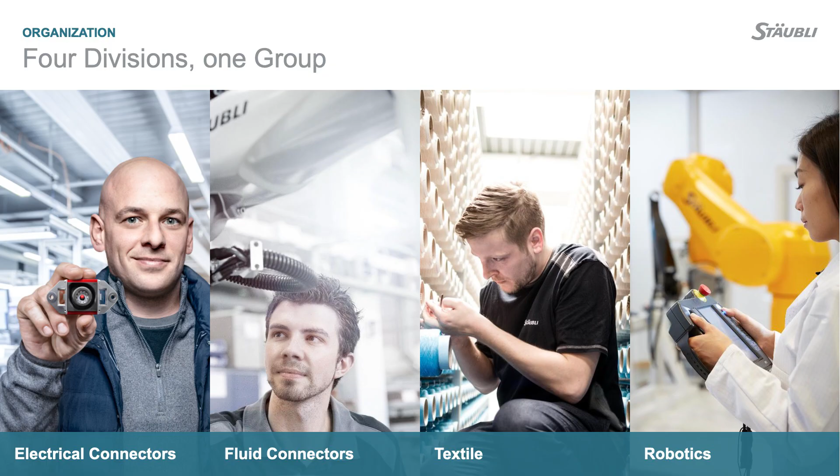Stäubli is composed of 4 divisions: electrical connectors, fluid connectors, which is exploding due to the supply of fluid connectors to data centers for AI, textile, the historical part with more than 100 years of history, and the robotics division, founded in the 80s of last century. Just a quick overview of the robotics division, founded in 1982.

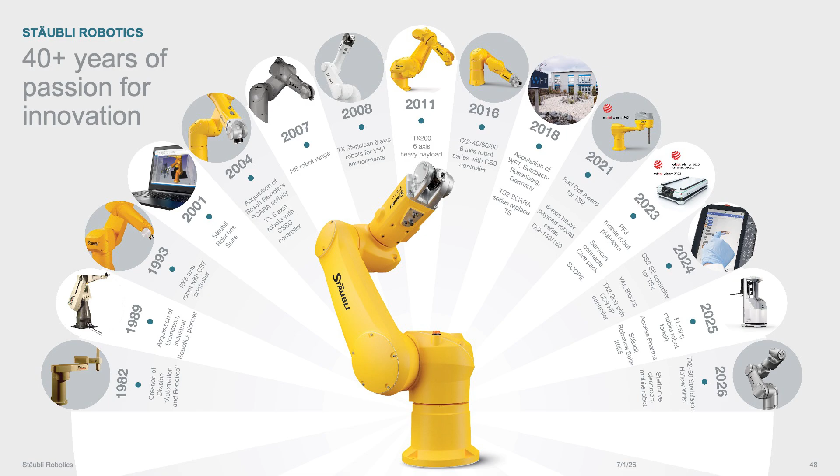One remarkable part was the acquisition of Unimation, a pioneer in robotics in the US, in 1989, and all the evolution till today. One remarkable point is the launching of the mobile robots in 2023, and last year we presented our FL1500, a counterbalanced AGV AMR, which is having a great reception from the market of logistics.

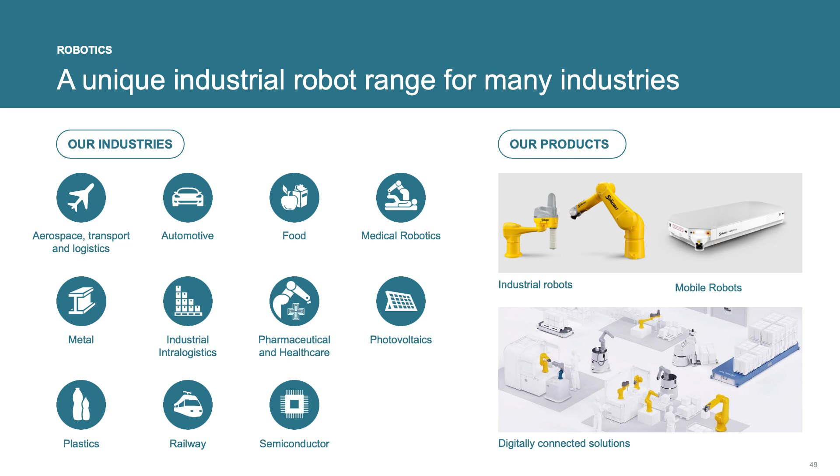We are present in almost every market. We are very well known for what we call life markets like food, medical robotics, and pharmaceutical. We are present in all the other markets like automotive, defense, and we are here in order to deep dive in our product for metal markets.

Yes, and I would like to present to you CNC Solutions, which is our company. We are a machine building company, and we are also a dealer of ENCY for Belgium. We focus on milling, grinding, but also cutting applications, laser applications, and we do this with Stäubli robots. We are a Belgian company, so located in Europe. We were founded in 1992 by my father. So me and my husband are now 2nd generation in the company.

We started with 3-axis milling, and we evolved into robotic milling throughout the years. So we are active for over 30 years. This robotic milling evolved to other applications also. So our company has a long story. We have solutions in 3 different types. We have turnkey, so for the end user who is looking to automate the process, to have a complete machine to go from design to workpiece, we can deliver a full solution.

We have the technology package for integrators, so robot integrators who want to integrate their own process into it. And then, as I said, we are a dealer of ENCY for everybody who has a CNC machine or a robot, of course.

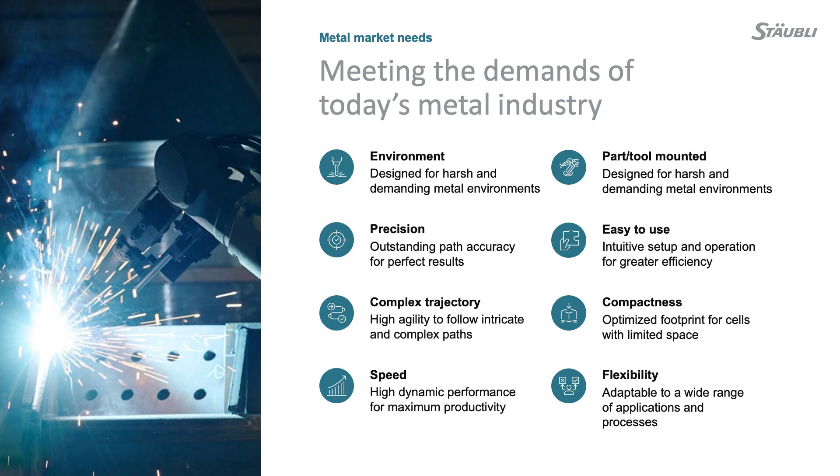Thanks, Lieselot. In the first half of the morning, we discussed a lot regarding ENCY and in which way we can generate trajectories. In the following minutes, we would like to deep dive in what happens after the trajectory is generated in order to create the best process possible in terms of manufacturing. The metal industry right now is a demanding environment with harsh, demanding features. It's demanding a lot of precision, complex trajectories, as was well explained before.

The speed is a very important feature because the return on investment of machines is becoming more demanding day by day. So producing with a high speed ratio will increase the return on investment of the machine. And also ease of use for the customer and flexibility are becoming very important day by day due to the lack of experienced users worldwide.

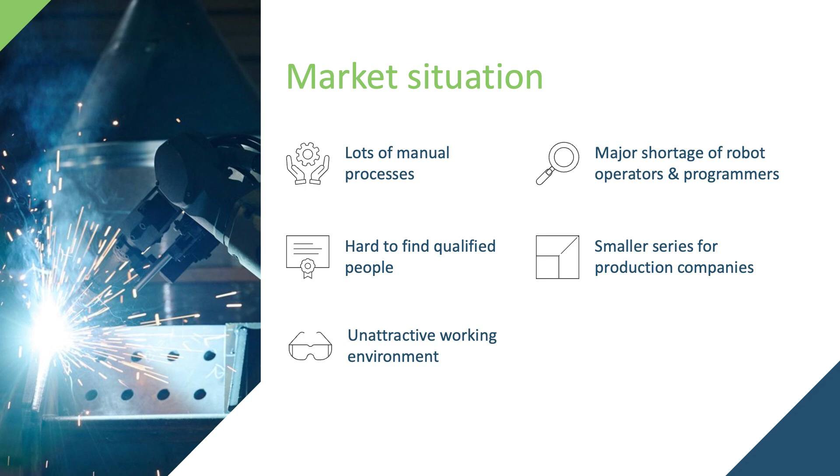What we also see in the market is that there are still a lot of manual processes. A lot of things are still done by hand, mostly by people who are very experienced, but who are not so easily replaceable. It's very hard to find qualified people. Companies are more and more looking to applications that have no-code programming. Mostly these manual processes have an unattractive working environment. For example, if somebody has to grind all day, it's a lot of dust, it's not so healthy. A lot of people don't want to do it anymore.

On the other hand, if you want to start working with robots, there's a big shortage of robot operators, robot programmers. So we were looking for a much easier solution. And then we find also that customers need much more flexibility. They need to produce smaller series and they have to be able to switch easily.

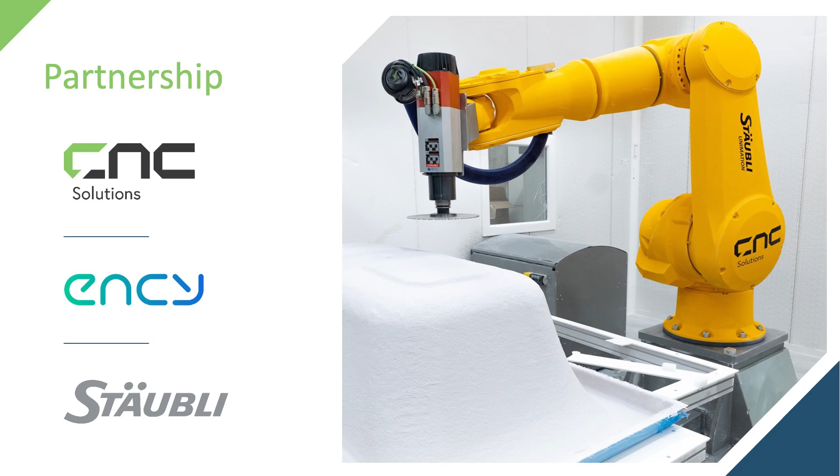The solution that we present for this is a partnership between CNC Solutions, ENCY, and Stäubli Robotics. And we call it the technology package. The technology package is a controller that you can use to control your robot like a CNC machine. So it makes it much easier than robot programming because you can program it like a CNC machine.

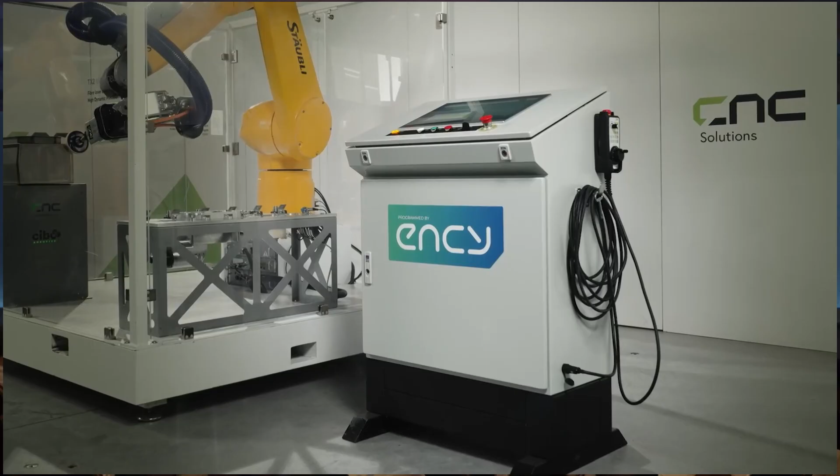So why did CNC Solutions choose Stäubli Robots 15 years ago, and why do they remain on this position?

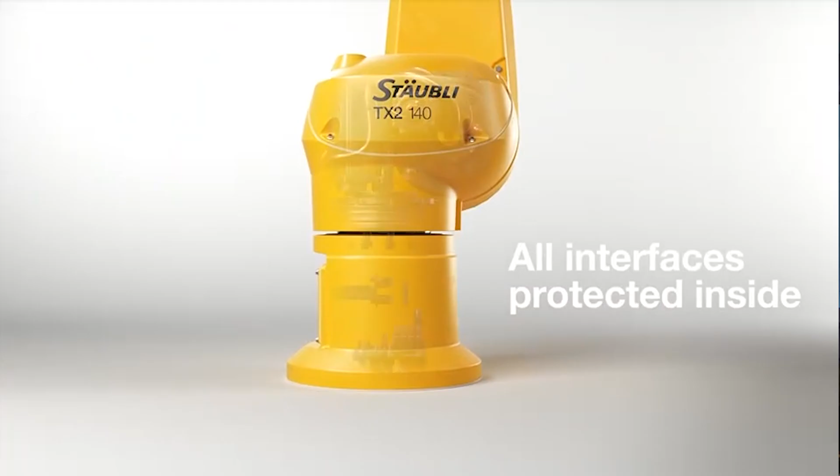Just a focus on our TX2 range. As you have already seen by the previous video, our characteristic is a fully encapsulated robot, so you cannot see any motor outside, and this, from my point of view, is very beautiful. People say that Stäubli is a reference as a very beautiful robot. For harsh environments it's important because the closed structure can protect the cables and all the other sensitive parts.

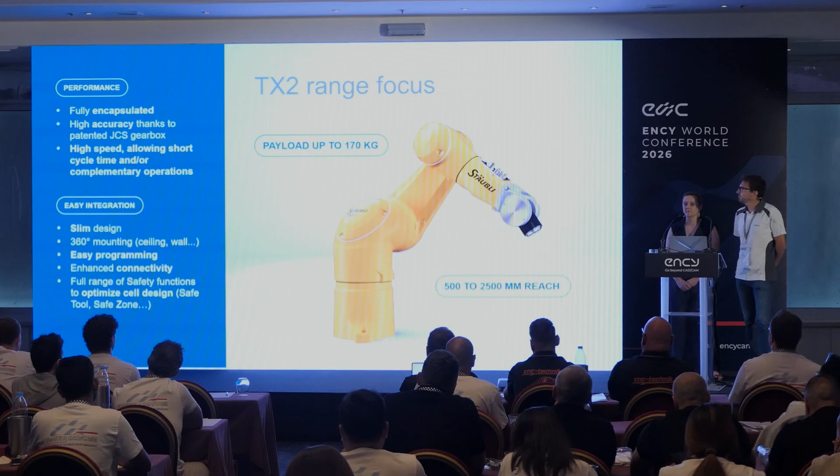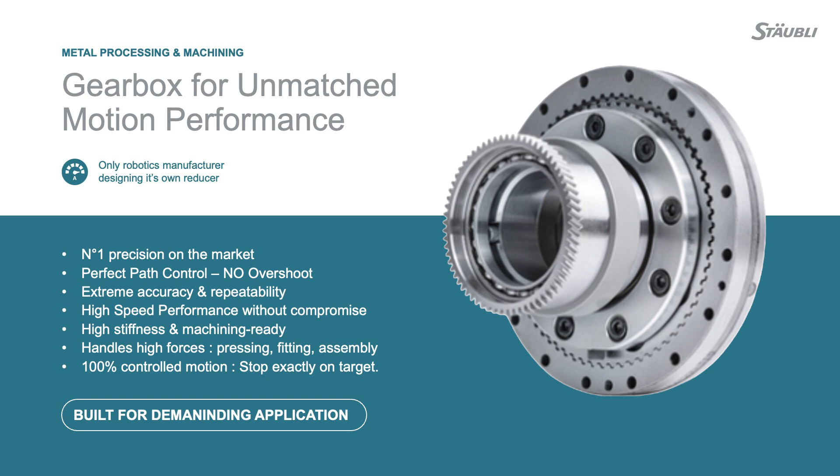There is very high accuracy, and one of the main features is that we are the only robot manufacturer who creates his own gearboxes. We have more than 8 patents, and we manufacture our gearboxes in our production plant in France, which are a reference for the market in terms of precision and speed.

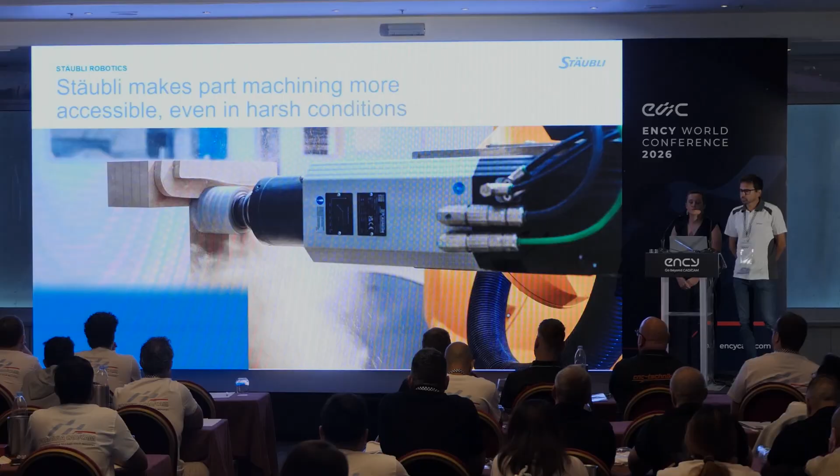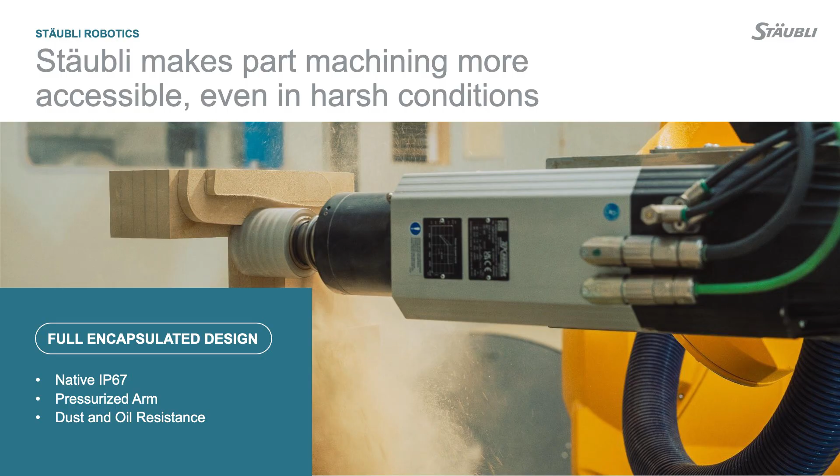As I said before, we will go into details regarding some processes and explain why, for us, the combination between the CNC Solution Technology Package and Stäubli Robot could be a game changer for the development of ENCY worldwide.

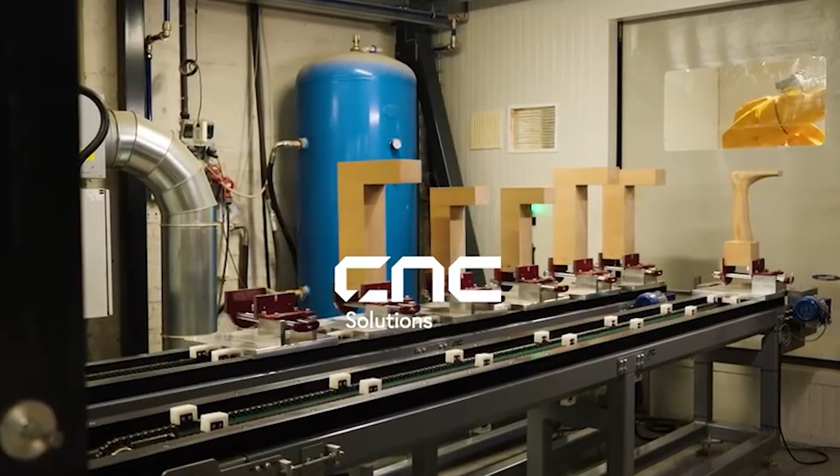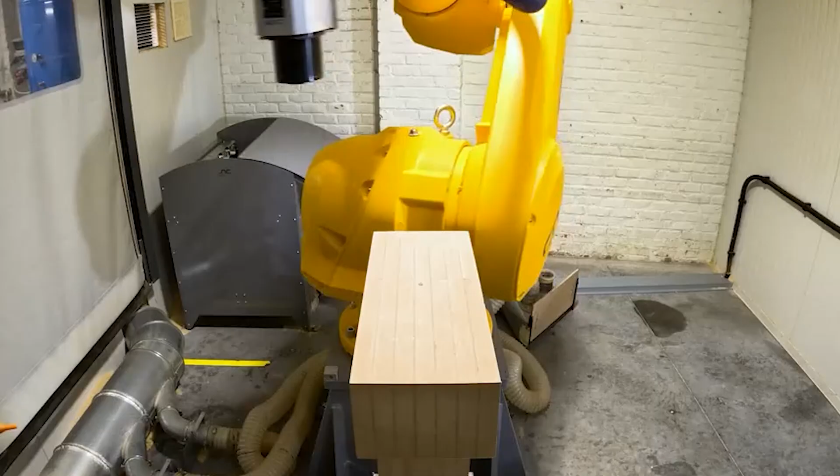Starting from milling. A Stäubli robot is very good for a harsh environment. We have a project here with a customer who makes orthopedic shoes. They scan the foot of people, then with the scan they make a foot out of wood, and from this wood they make the shoe. Since they are scanning people's feet, every piece they create is unique, so they mill the feet every time, once and again.

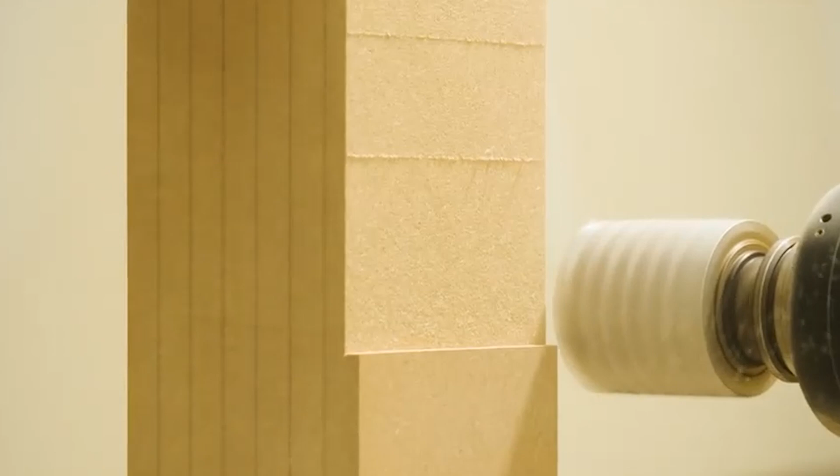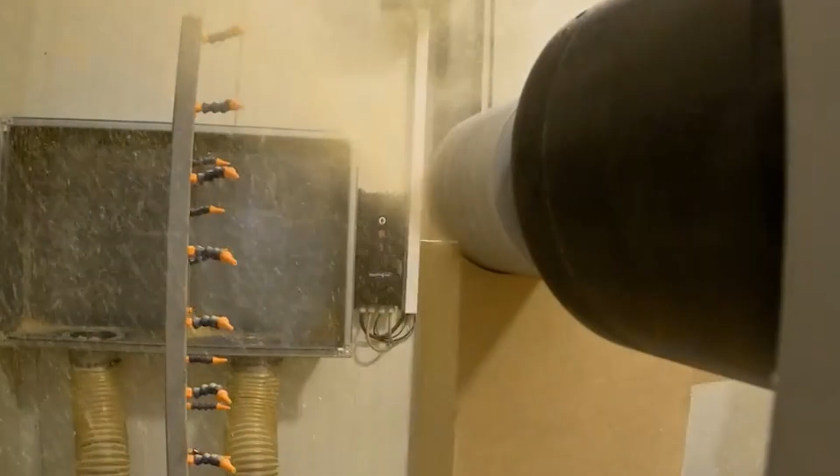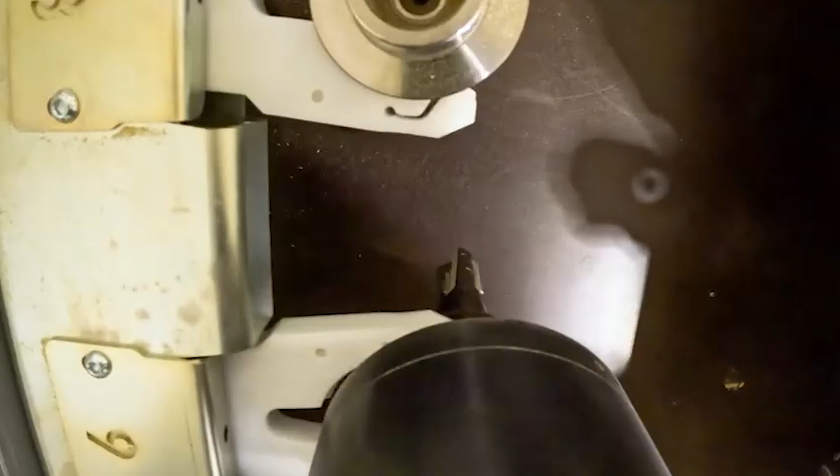How do they do this? Of course the toolpaths come from ENCY. We created templates for them, so they put their information from the scan into these templates, and with just a few clicks they can mill the foot. This is all done by one person, so there's no dedicated operator needed to control this machine. Somebody just programs ENCY, puts on the workpieces, comes back a few hours later, and then the pieces are ready.

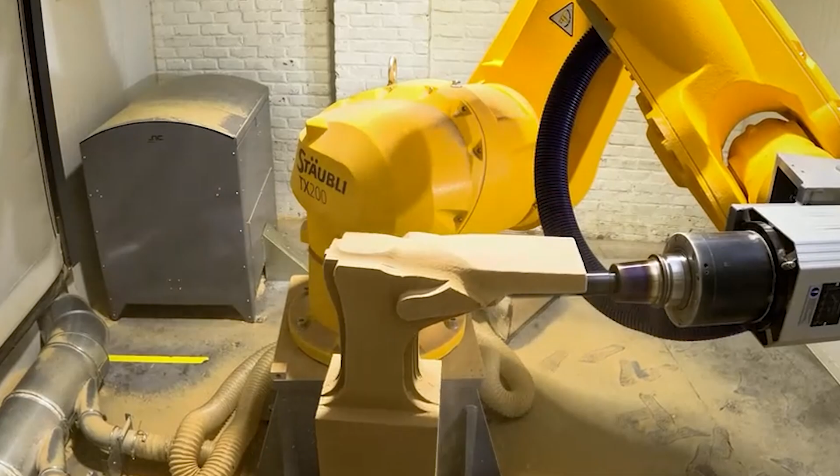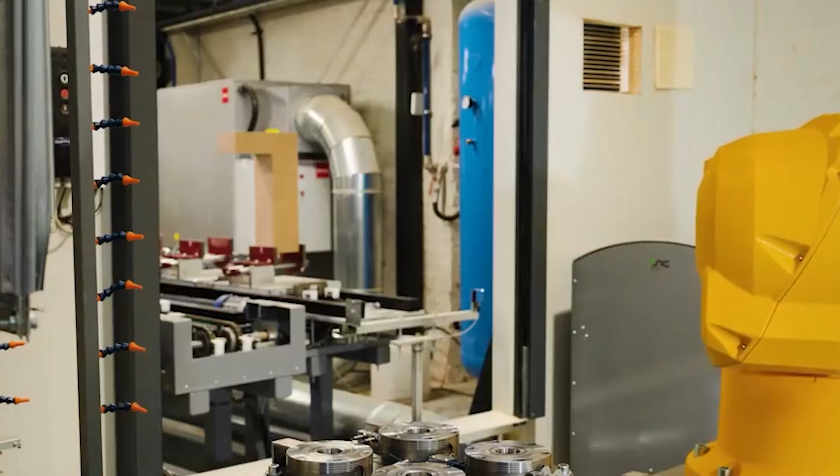As you can see, the pieces are automatically loaded and unloaded from the machine, so the operator only has to be there every few hours.

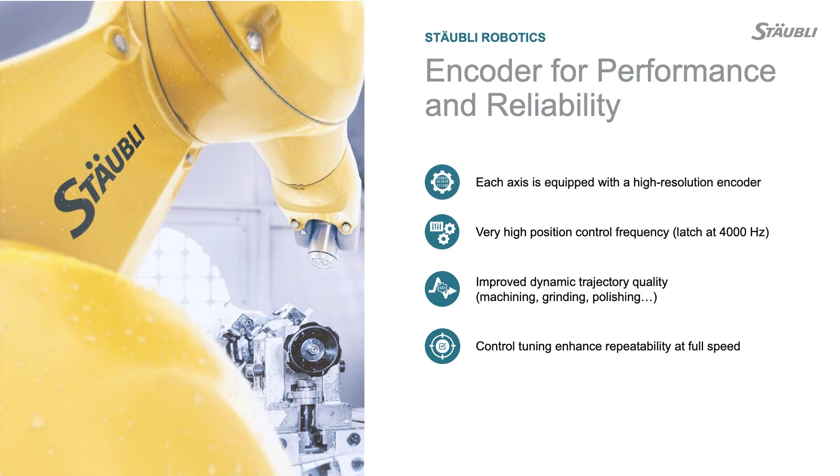Also, the tuning designed to handle our motor and gearboxes with our drive gives us very precise path control. A little bit more technical digression.

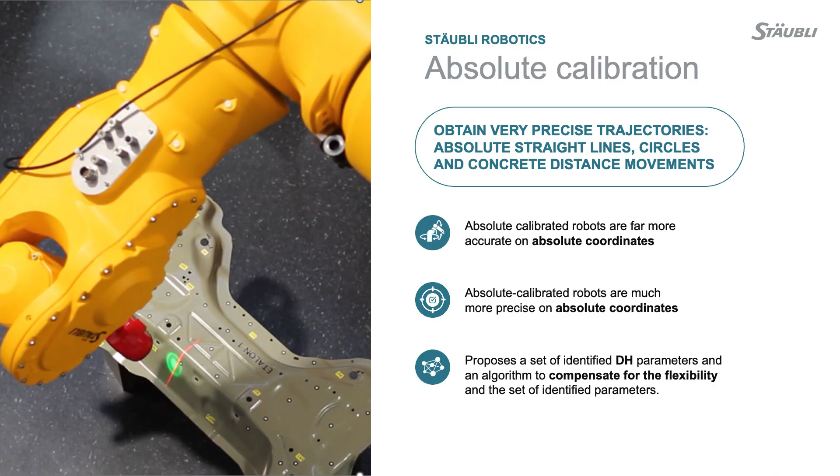We all know that if a robot is doing a pick and place, precision is very important. If the robot is used in the traditional way, moving with the teach pendant, teaching points and relaunching, only precision matters. In a CAD/CAM application like this, accuracy has a very big impact on the quality of the process. That's why we propose, and use massively, our absolute calibration feature.

It means that every robot produced in our factory is measured using a laser tracker in order to adapt the DH parameters, the Denavit-Hartenberg values which are the distances between every joint, so that the algorithm of inverse kinematics matches exactly this robot.

Without absolute calibration, the mathematics of the robot would use an average of the robots produced. With absolute calibration, we measure the robot as it exits the factory to be sure we are inserting into the robot controller the effective length of this specific robot, following the variation of production.

And this lets us have one of the best accuracies in the market for this type of robot, the TX200 that we are seeing here, a robot with 100kg payload and 2 meters long.

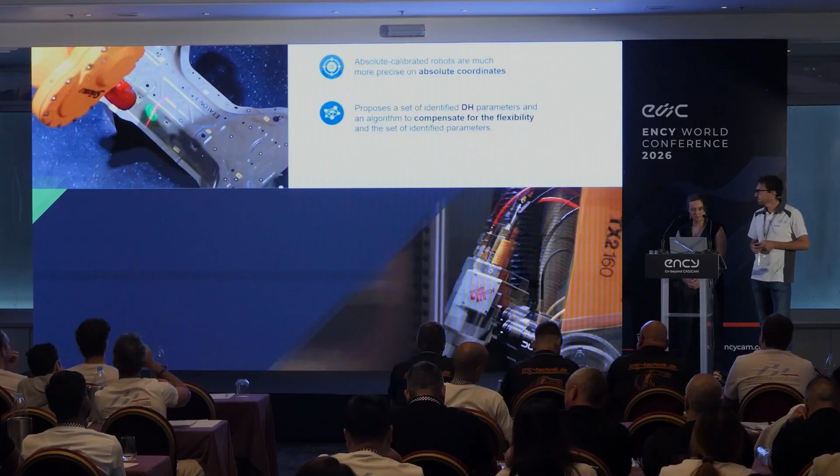So we can show you a laser cutting example where we will be laser cutting on flat plates, but also in 3D. Of course precision is very important here. The combination of a very precise robot with toolpaths in ENCY is a golden combination for this application.

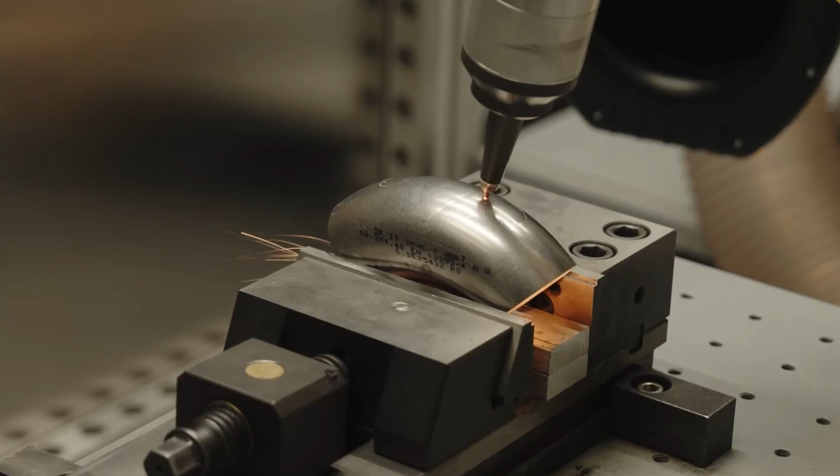After that, we have generated a trajectory using ENCY, as we are seeing from our videos. The robot is transforming this trajectory to a process.

One point that is very important is the rigidity of the robot, because if we're talking about pick and place, we can make this process with cobots, or what we call marshmallow robots—robots that are maybe light, maybe cheap, but they don't have enough rigidity to transform the trajectory into a reliable process.

What we said before, the patented gearboxes, the enclosed structure, and the precise trajectory generation combined with absolute calibration lead us to be one of the most appreciated robots in the market in terms of rigidity and stiffness. And this led us to all these processes that we are seeing here.

And of course, if you're looking for flexibility, then ENCY software is the way to go. In the next video, we can see different approaches to laser a piece. We do that in 4 different ways, and every time it's precise. It's a laser demo, so you will see a small light showing what the laser trajectories are.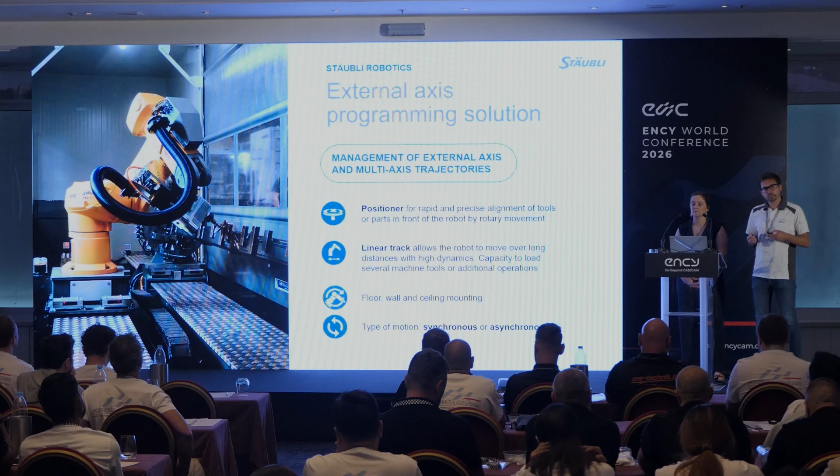So after, Lieselot will go deeper into this topic. Basically, CNC Solutions has developed a system for handling the robot that is able to manage in a perfectly synchronous way all the tasks involving the robot, external axis, and external rotary positioner.

This is an example of a deburring robot. We have a customer that makes weaving machines for textiles, and they have large cross beams that have to be deburred. They mill 2 types of cross beams and then deburr them with our robot.

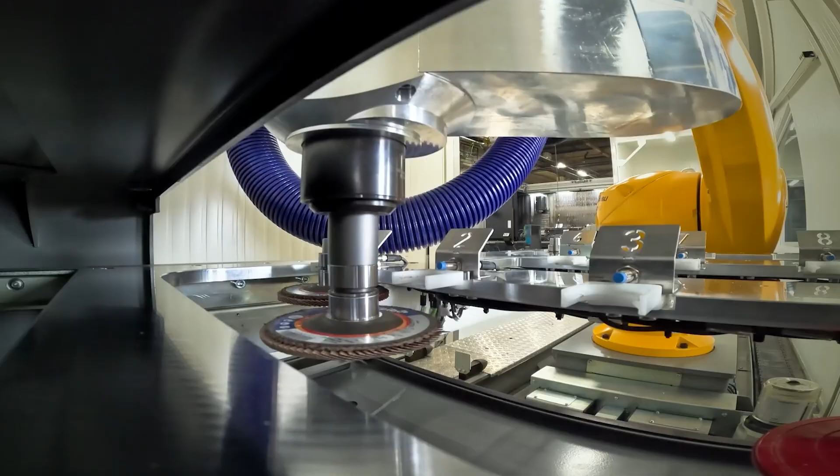The pieces are attached onto a horizontal turntable, and the robot is on a track because of the large pieces that it has to deburr.

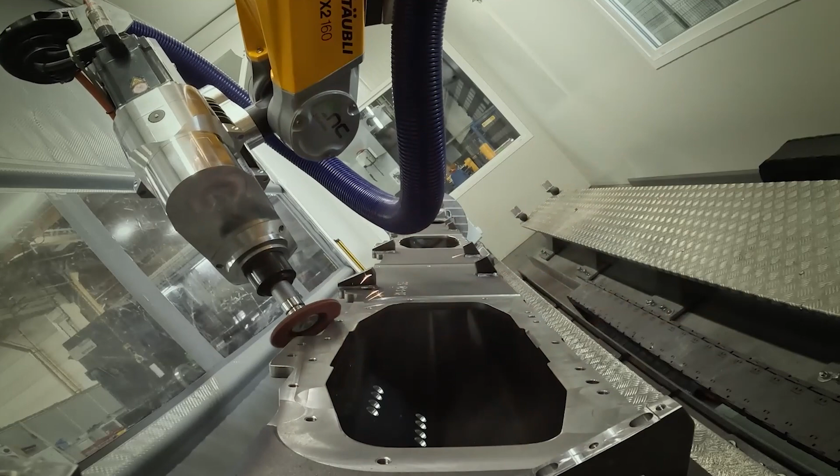The pieces are of course in series, so they're all the same, but they can differ by approximately 5 mm. We can perfectly solve that with trajectories in ENCY, and also with our grinding head that we created ourselves, which is also a compensator, so we can do every corner very precisely.

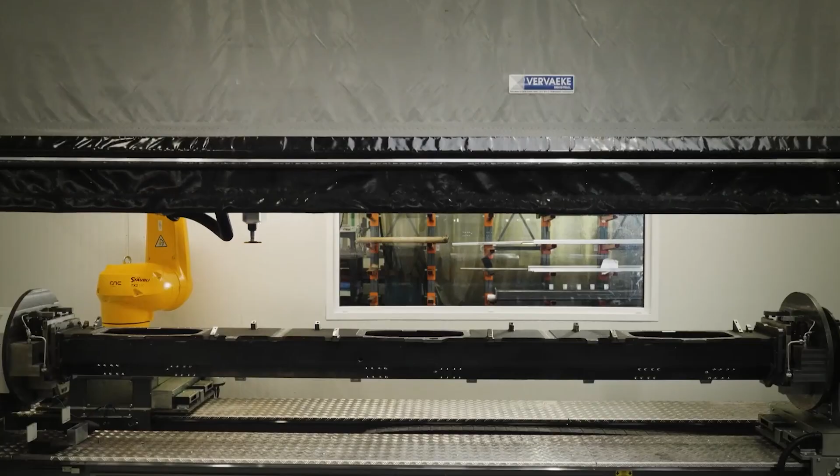And then if they want to switch to the other type of crossbeam, they just have to push on the pedal. The machine adapts itself for the other piece, and then they can start deburring the other type of crossbeam.

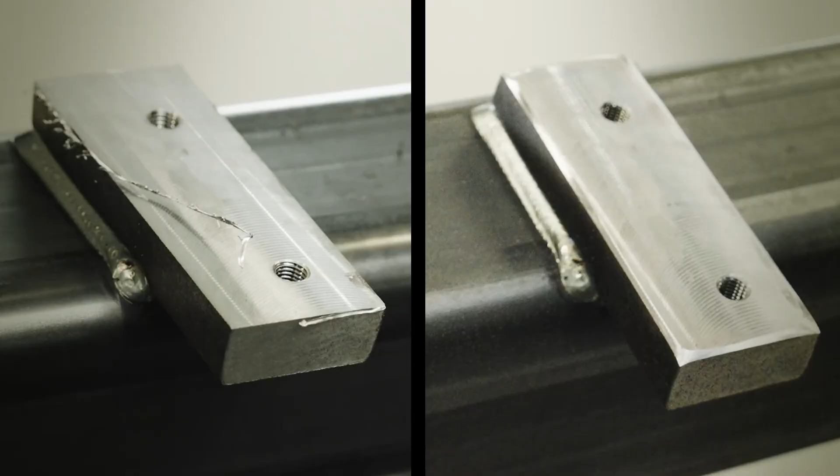They were able to save 1 operator per shift because of the installation of this machine. And this is the result, of course, completely done by the robot.

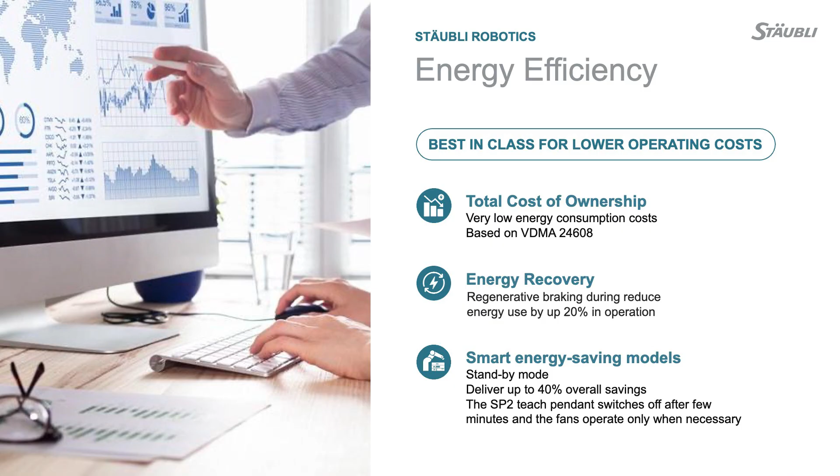At Stäubli, we take into account environmental and energy efficiency topics, also because we are maybe the last fully European robot manufacturer. We have very strong attention to that.

So we have an energy recovery system similar to the KERS of F1, which is the trend of the day. During braking, the robot recovers power in some capacitors and reuses it for the restart. This efficiency in energy consumption leads us to increase the return of investment of the machine and reduce the total cost of ownership, which is becoming day by day one of the most important parameters in choosing automation.

So let me now show you a few examples. Let me go into detail on this technology package.

It starts, of course, with a drawing. Somebody wants to create a workpiece. It starts with a design, a drawing.

The next step is that we create in ENCY the virtual machine. As you know, with the virtual machine, we can check everything. We can see if there are no collisions, if there are no singularities. That can all be simulated offline, as you know, with ENCY, so the robot does not have to stand still.

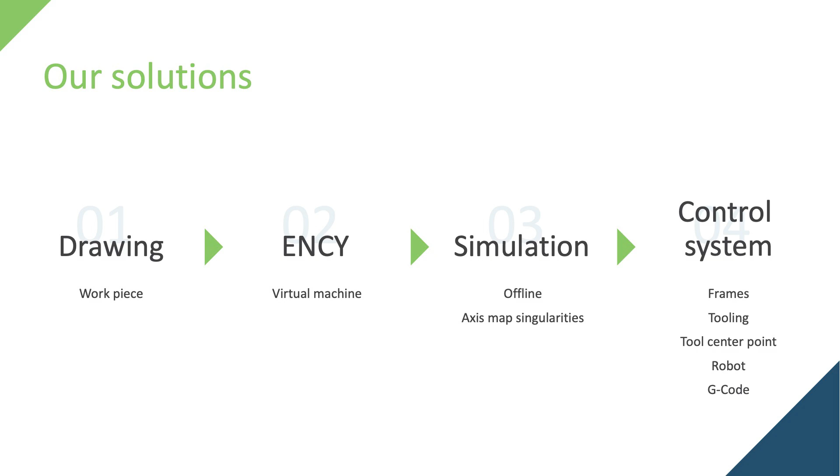And then from that, we go to the control system, to which we send G-code, and that way the robot can be executed. So all this together comes into a technology package. The key of the whole concept is that you can control your robot like a CNC machine, which makes it much easier to control, and to do precise trajectories with your robot.

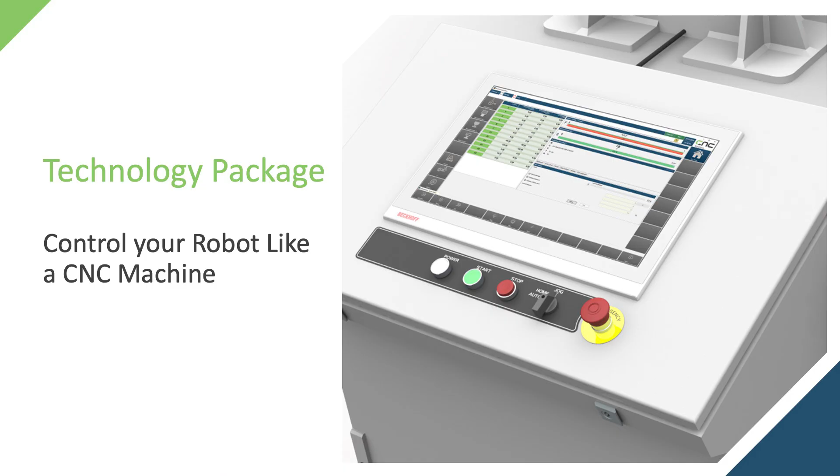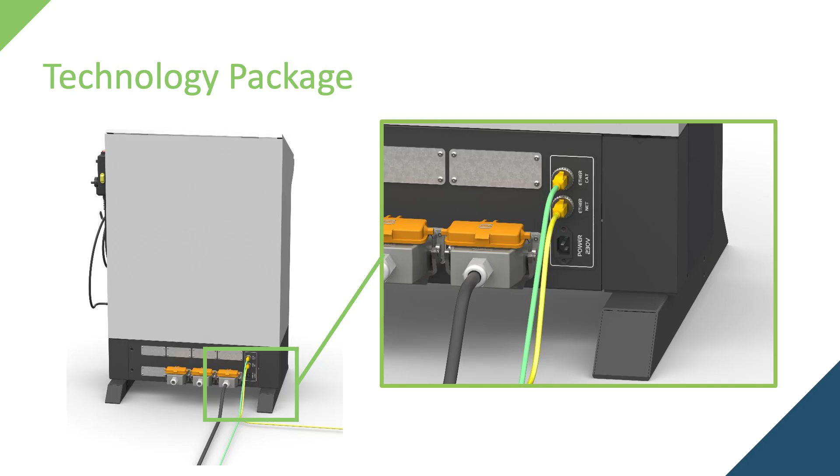It's a combination of hardware and software. The hardware is in the cabinet. It's plug and play—you plug in the Ethernet to the robot, you can connect to your network, and you have room for the process that you want to control.

And then what we particularly added is a handheld, similar to a CNC machine. With the encoder wheel, you can change the speed of the robot—the faster you want, you can do it. It's very easy if you want to do something manually, if you're still in testing phase, or if you want to interrupt your process for some reason. In joint or in frame, you can control every axis separately. That's really an extra to this robot that we are providing with the technology package.

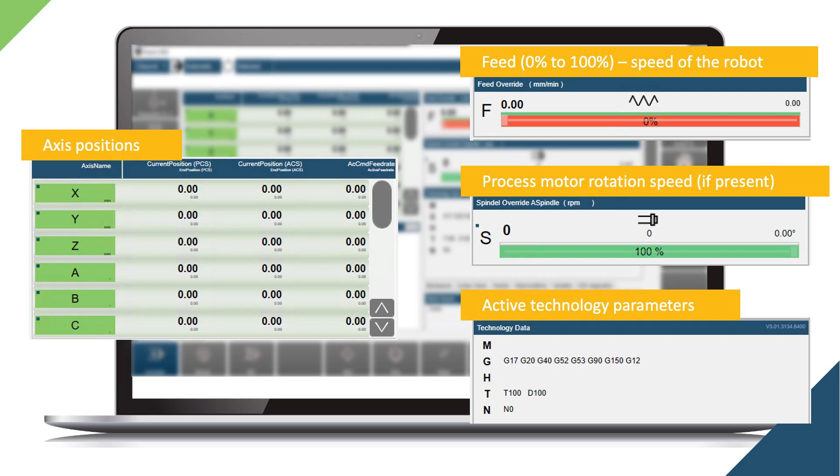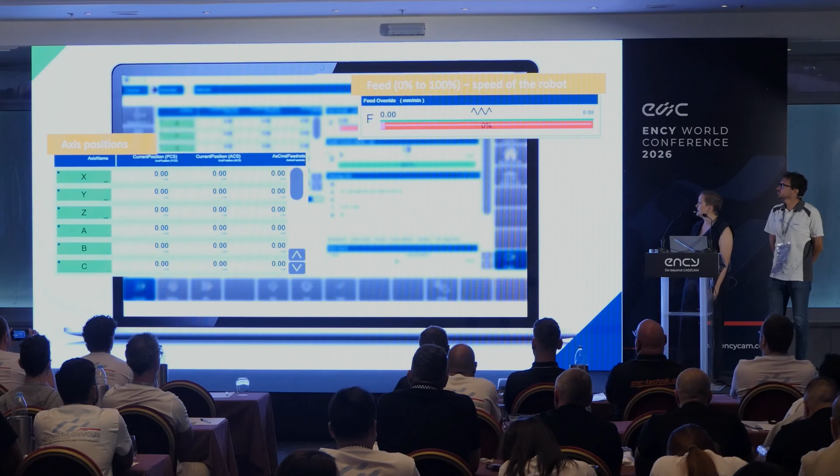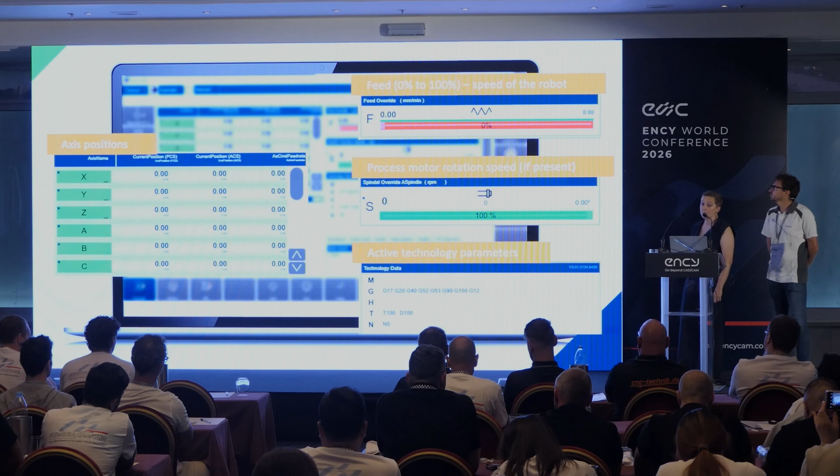Then software-wise, you get a whole interface to control your robot. It has different parts—this is the starting screen. You have the axis positions, so it can be the robot, but also external axes that are added. You can also add external axes later on if you'd like. The feed, so the speed of the robot and the speed of the external axis, can be controlled. Then if there's a milling motor or a grinding motor, you can also adapt that speed. And then there's the technology parameter specifically for your process.

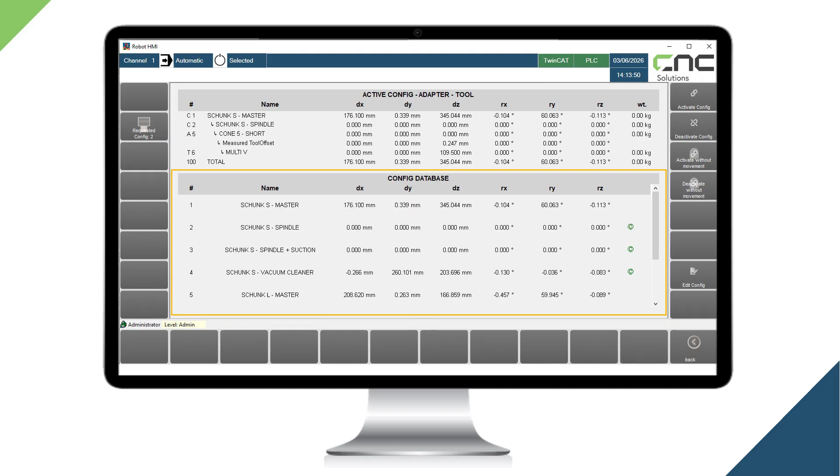It's also very much made for tool changes. So you can change the master, you can change your adapter, and you can change your tools very easily. In this way, in the software, you put in the different configurations that you want to do. So in a first step, your configs, in a second step, your adapters, and in a final step, the tools that you want to have into these adapters.

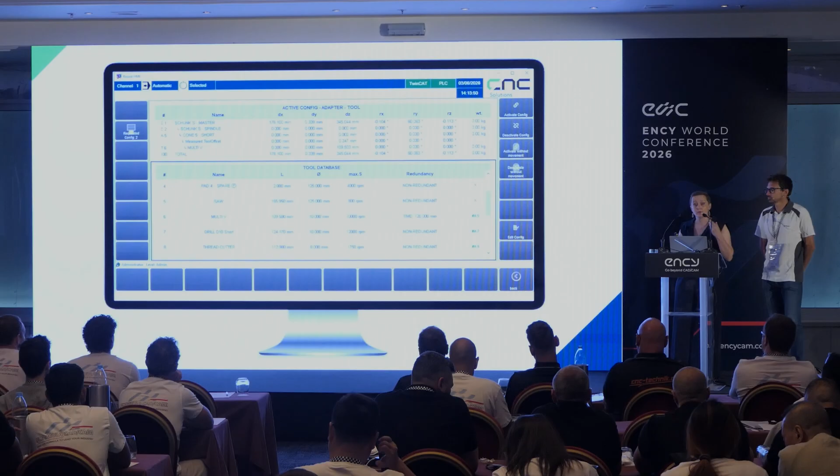We always work with the theoretical tool length in ENCY, and we work with the real tool length in the technology package. This way, if you want to reuse your ENCY program, you can easily do it. You can adapt the real tool length in the technology package, and the robot can still be controlled with your existing ENCY program. As for tool change, we have an example here—it's a deburring robot you just saw.

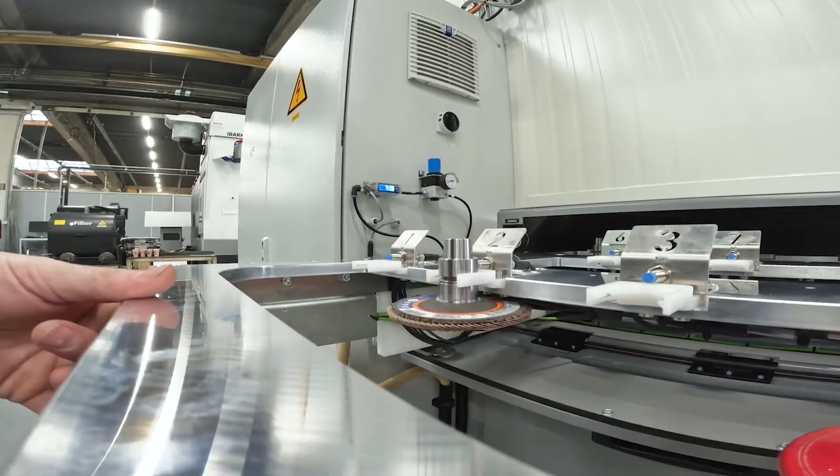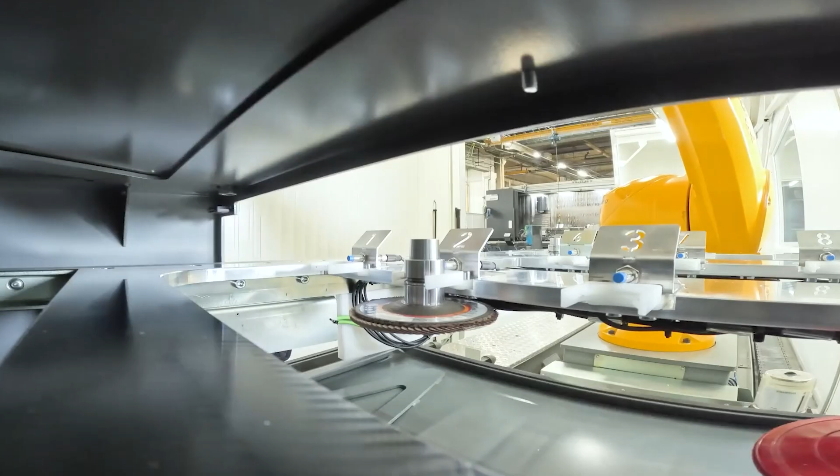The operator can load this toolbox from outside the robot cell. This toolbox is also an own creation of our company. So the operator loads it into the drawer, and then the robot can take it out in the cell. Again, the robot does not have to stand still if you want to change a tool—it can easily take up another tool automatically.

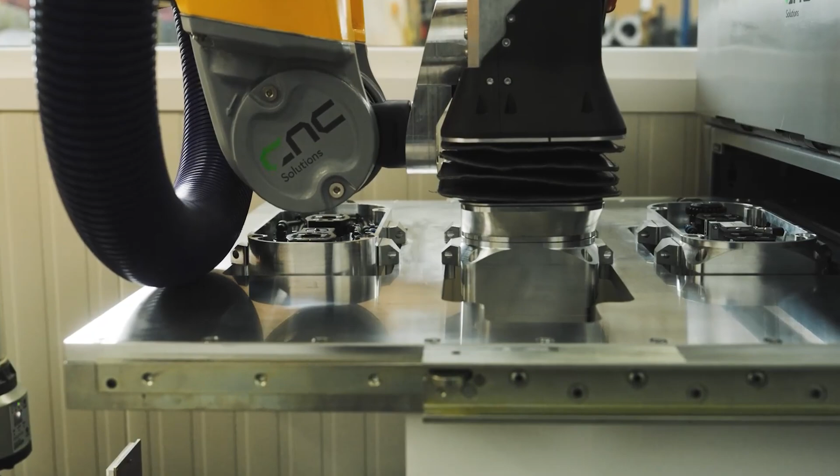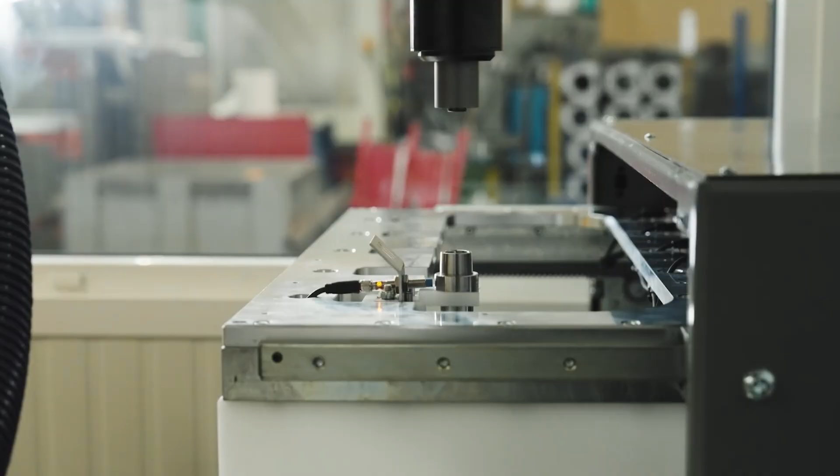But it can also pick up another base, so it has multiple drawers. If it picks up another config, then the direction of the tool can change. And then again, it picks up its tool and it's ready to go.

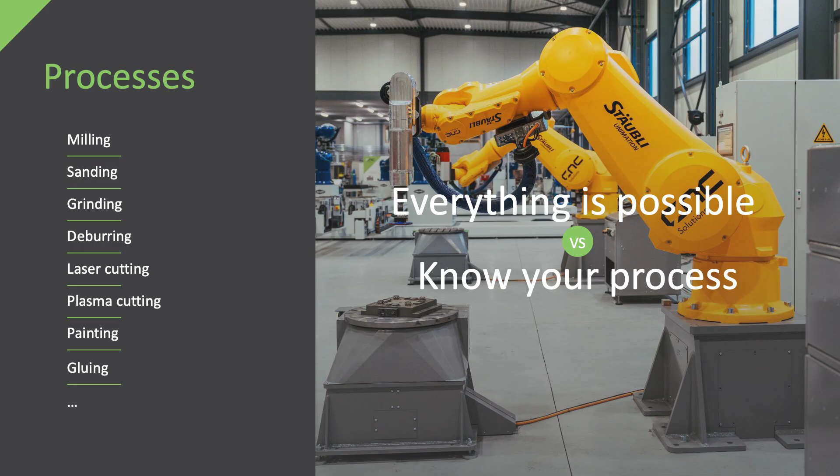So this combination of the Stäubli robot with ENCY and a technology package is possible for a lot of processes. If you're wondering what is possible, theoretically everything is possible. What is important is that the integrator controls its process—you really have to be owner of the process. You have to know what the process-specific options are, what it needs to control, and in that way you can be successful with this technology package.

The technology package is the result of over 15 years of development by our company. We did a lot of trial and error, a lot of development engineering, testing, and a lot of things with it. It's already 15 years that we are collaborating with Stäubli and ENCY on this, and we have over 50 references in Belgium, France, and the Netherlands—working applications that we have today. So it's my invitation: if you want to profit from our research, if you want to be able to absolutely precisely control your process, the technology package can be considered a very good option because we have already done all this development and you can profit from it.